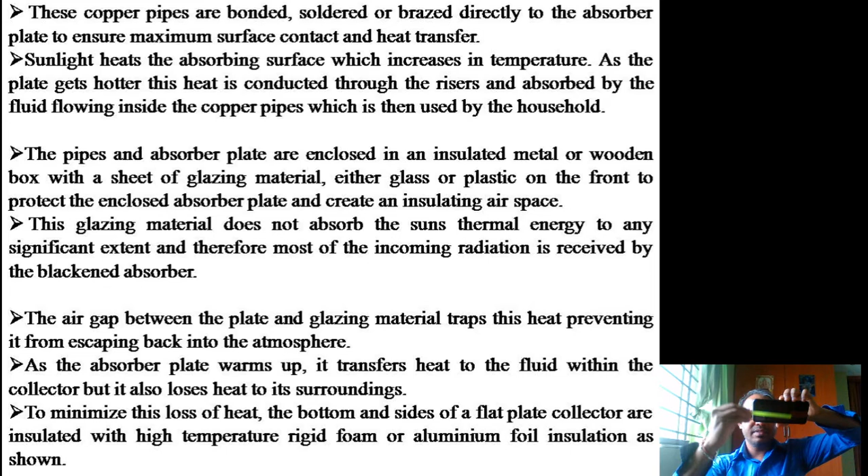That is what I have given in words over here. These copper pipes are bonded, soldered or brazed directly to the absorber plate to ensure maximum surface contact and heat transfer. Those pipes or risers have been connected, something like this, a series of them. Sunlight heats the absorbing surface, which increases in temperature. As the plate gets hotter, this heat is conducted through the risers and absorbed by the fluid flowing inside the copper pipes, which is then used by the household.

The pipes and the absorber plates are enclosed in an insulated metal or wooden box. As I was just talking about in this figure, thermal insulation. It can be anything which doesn't conduct heat. That is our intention. It can be an insulated metal or wood. Now my dear friends, if you take steel, it may be around 120 or 150 watts per meter. If you take some composite materials, the thermal conductivity may be less.

Now here they may use a wood or any box with a sheet of glazing material. A glazing material is used only to reflect more and more light. Now here I will tell you.

Now here the side walls are always used with some glazing material. What do you mean by glaze? Glaze is something like a shining. So what happens, the solar radiations will be reflected faster. If you have a matte surface, if you have something like wood, the solar radiations which are falling onto that will be absorbed and will not be reflected much. So they will have a shining surface, that is a glazed surface, in order to increase the rate of reflection of the solar radiations. However much it reflects, that much of the solar radiation heat will be entrapped.

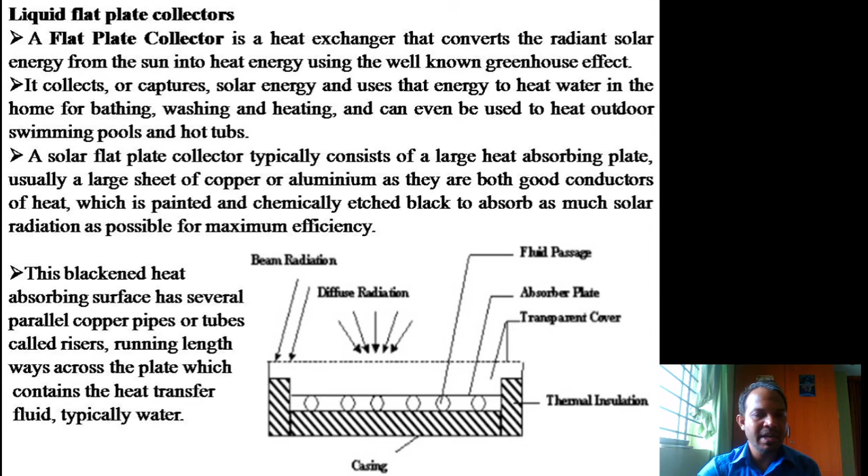Okay, the glazing material, either glass or plastic on the front, protects the enclosed absorber plate and creates an insulating airspace. This is the distance between the absorber plate and the glass. This is where the heat will be getting entrapped. The air gap will be there. I will illustrate it; I'll show you with one more better figure.

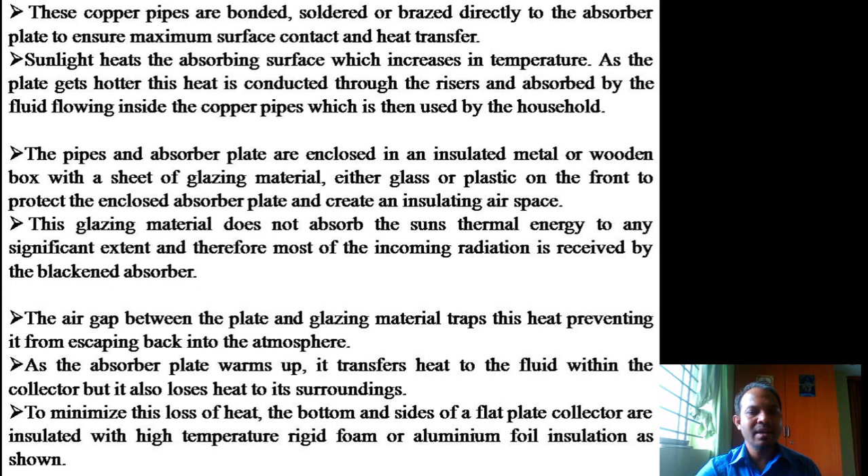Insulate. Either glass or plastic on the front to protect the enclosed absorber plate and create an insulating airspace. This glazing material does not absorb the sun's thermal energy to any significant extent, and therefore most of the incoming radiation is received by the blackened absorber. The air gap between the plate and the glazing material traps this heat, preventing it from escaping back into the atmosphere. As the absorber plate warms up, it transfers heat to the fluid within the collector, but it also loses heat to its surroundings.

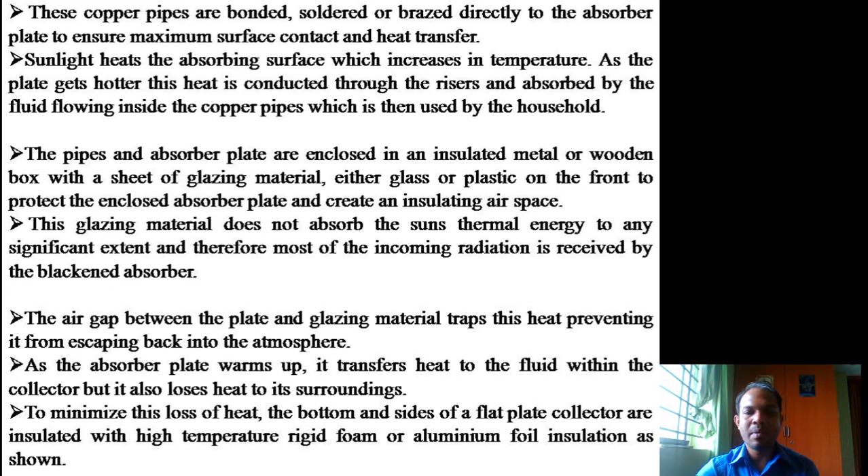To minimize this loss of heat, the bottom and sides of the flat plate collectors are insulated with high temperature rigid foam or aluminum foil insulation as shown in the figure. Now here this gives you a clear picture. You can see this is the sun from which solar radiations are coming. We don't differentiate whether it is beam or diffuse radiation. We just want heat or radiation.

We are taking it over here, and then some part of the infrared radiations will be reflected, and this is happening because of convection. So a convection; rain, wind or snow blowing against this glass plate just takes away heat, but whatever heat is inside will be absorbed by these thermal copper tubes.

Then this is the front glass, as you can see here in blue, and then there is an absorber which will be painted black, and then you will have a number of tubes which we call risers, and this is the casing. Insulating material will also be there inside, and there will be glazed layers. This is how it happens, and then the thermal output will be taken to the fluids that can be used.

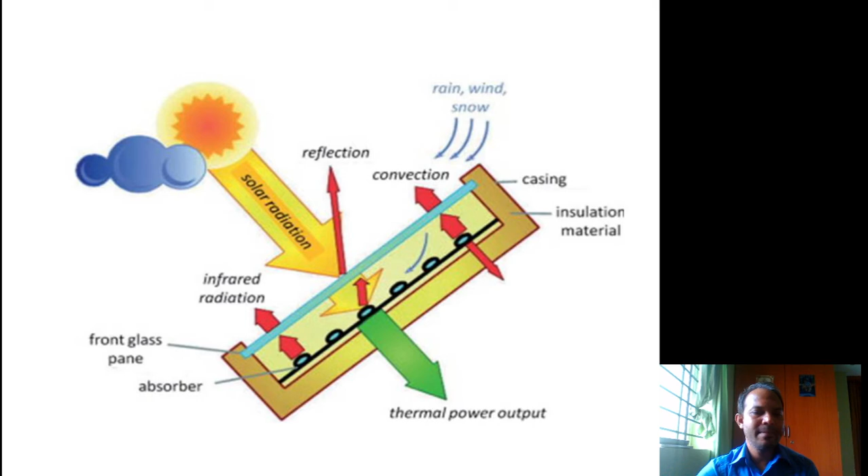Now this solar heater. The previous one is a flat plate collector for water heating. Now let us talk about the solar air heater. The concept remains the same. There we heat the water, whereas here we heat the air. As far as my knowledge is concerned, heating air is easier compared to heating water. I'm not saying it is easier without any reason.

It is because when you compare the properties of water and air, the density of water is 1000 kg per meter cube. The density of air is 1.12 kg per meter cube. Where is 1.12? Where is 1000? That means water is about 1000 times heavier, whereas air is only 1.12 kg per meter cube compared to 1000 kg per meter cube. Now just think which one requires less time for heating. Is it not? So based on that context, I told you. So let me come back over here.

The air stream is heated by the backside of the collector plate. In the flat plate collector, fins are attached. A fin is a device which increases the convection. A fin is an external attachment which increases the surface area. Thus it also increases the convection.

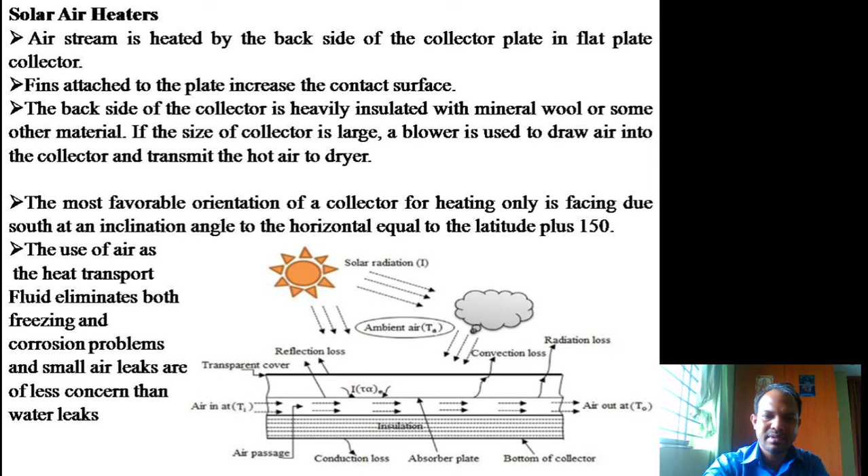When it absorbs more heat, the temperature of the air increases more. So this hot air is used for different purposes. It may be used to convert it into mechanical energy, or it may be used as an air dryer, or it may be used in space heating, where in cold countries you feel very cold. In order to use the air conditioning system, they will use air heaters, basically. So these are a few applications of solar air heaters.

Now, collectively, for solar air heaters, the major disadvantage or drawback is the need to handle larger volumes of air than liquids due to the low density of air as the working fluid. The handling problem is greater because there are chances of leakage.

Okay, the thermal capacity of air is low. My dear friends, you know the basic properties of any fluid. The thermal capacity of air is low. That is the reason why air is used as an insulator in our thermoflask. In the thermoflask, between two layers there is air. This air acts as an insulator. Why? Because its thermal capacity is less.

When you take the thermal capacity of water, it is 4.18 kilojoules per kg degree Kelvin. But for air, it is quite less. It may be 0.718 for constant volume and 1.005 for constant pressure. So it is around 1, whereas for water it is 4.19, the heat capacity. They have relatively high fluid circulation costs, especially if the rock heat storage unit is not carefully designed. That is one major drawback.

They have relatively large volumes of storage, roughly 3 times as much volume as water heat storage. That is what I was just talking about. For a solar water heater, if you have a panel like this, for air you need to have one 3 times larger, because it has to transmit more and more. The more the exposure to heat, the more heat will be gained by the air.

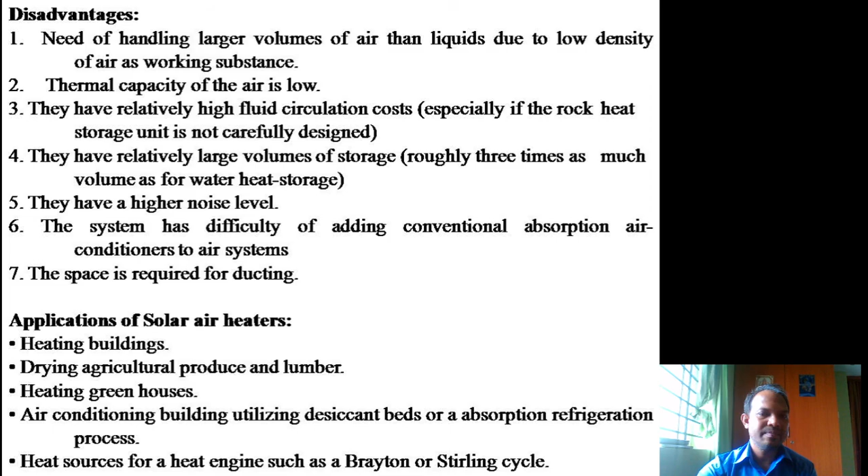A flat plate collector is a device to collect solar energy and transform it into thermal energy by using water as a working fluid. It is the heart of solar thermal devices and has many applications in the medium temperature range, approximately around 100 degrees centigrade. We may not reach 100 degrees centigrade in domestic applications, but still approximately near 100 degrees centigrade, from domestic to preheating to industrial sectors.

Flat plate collectors absorb both beam and diffuse components of radiant energy. The absorber plate is a specially treated blackened metal surface. The sun rays striking the absorber plate are absorbed, causing a rise in its temperature. This is what we have already discussed. Thermal insulation behind the absorber plate and transparent cover sheets, that is glass or plastic, prevent loss of heat to the surroundings. On most occasions we use glass, a transparent thin sheet, though plastic is also used.

A few of the applications of flat plate collectors: solar water heating systems for residences, hotels and industry. Desalination plants, separation of salt from water. That is what we call a desalination plant, which we shall discuss separately at the end of this module. Plants for obtaining drinking water from sea water. Solar cookers for domestic cooking, drying applications and residential heating. These are a few of the applications of flat plate collectors.